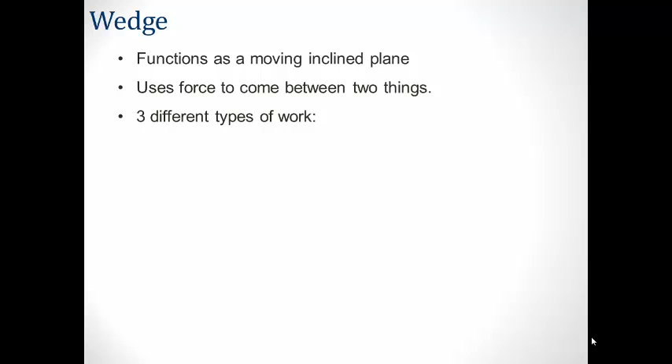This mini lesson is going to focus on the simple machine known as the wedge. The wedge basically functions as a moving inclined plane, and it can actually be thought of as two inclined planes sandwiched or placed together. It uses force to come between two things, and it typically can do three different types of work. One would be to connect things.

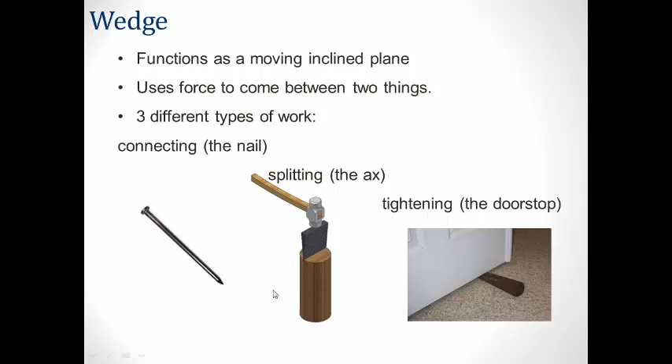An example would be the nail. It could be used for splitting things. A very common example would be the axe. Or it can also be used for tightening, and a good example of that would be the doorstop. Each of these represents the use of a wedge.

As with every single simple machine, there is a force-distance trade-off. The wedge is going to work just like a ramp. The narrower the wedge or the sharper the point, the easier it is going to be to drive it in and push things apart. The trade-off, though, is in order to get something to split apart really wide, you have to push the wedge a long distance.

So if you look at the picture, the amount of the wedge that I've got in there so far, the actual load is not pushed apart very far. To get that load to be pushed apart, that wedge needs to drive down deeper so that we can actually get that separation distance defined by the base of that wedge. The longer and thinner a wedge is, the less effort force is needed to overcome the resistance force.

Think about a simple kitchen knife. If you have a dull kitchen knife, that's because that wedge basically has been ground down. The sharper the knife, the easier it is to cut through food because you got a long, skinnier wedge once that is sharp. Another example, imagine you're trying to put a nail into a piece of wood.

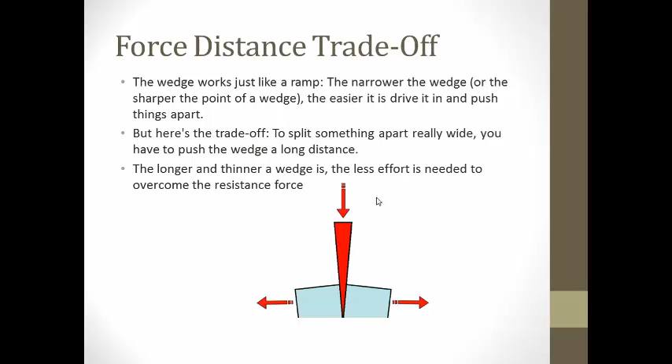What's easier, a long, skinny nail or a fatter nail? Hopefully you know from experience that the skinnier the nail, the easier it is going to be to drive in because it's got that, again, force-distance trade-off. The skinnier the wedge, the less effort force is going to be needed.

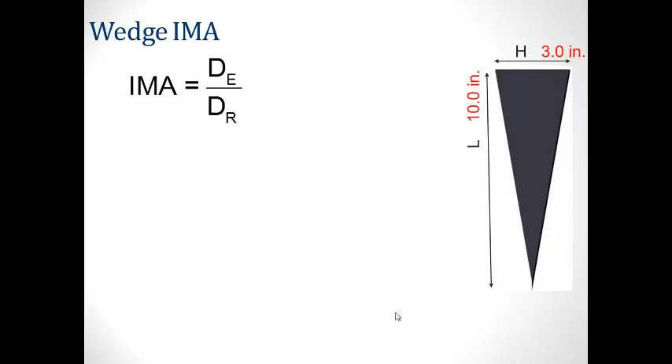So let's take a look at how to calculate the ideal mechanical advantage of a wedge. Just like every single simple machine, the ideal mechanical advantage is found by taking the distance of the effort divided by the distance of the load. What's different is where we take these measurements. The distance of the effort is going to correspond to the length of the wedge.

So as you are swinging your axe, you would have to go down this far to actually split your load or your wood apart. The distance of your load is the distance traveled by the resistance. That's going to correspond to the width of the wedge, in this case shown by the letter H. How far apart you're able to move your load is what we define as the distance of the resistance.

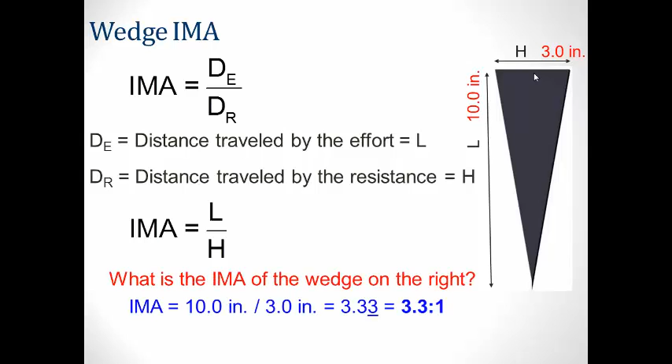Using the symbols in the picture, then, we're going to take the length of the wedge divided by the height or the base of that wedge to find our ideal mechanical advantage. In this particular picture, we're going to take 10 divided by 3, and we would get a mechanical advantage of 3.3.

Now there is some debate about whether the length is perpendicular to the height or the length represents the sloped surface. Using trigonometry, you could figure out how long the wedge is based on the height and that perpendicular length. Both methods are actually used, and there's very little difference in the calculation of the IMA with either measurement that you choose to take.

So for example, if I use my length to be the length of the slope, I would get an ideal mechanical advantage of 3.46. Notice it's only a little bit over 1/10 of a difference between the two measurements. So the moral of the story is it really doesn't matter which length you use. The mechanical advantage is going to be close enough when you calculate it.

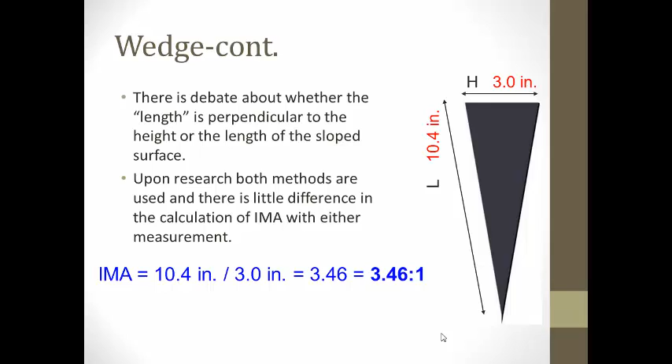The actual mechanical advantage is still going to be found by taking the force of the load divided by the force of the effort. Using this same wedge picture on the right, the force of my load is given as 700 pounds. It took 250 pounds of effort in order to move them apart that 3 inches. 700 divided by 250 gives us an actual mechanical advantage of 2.8.

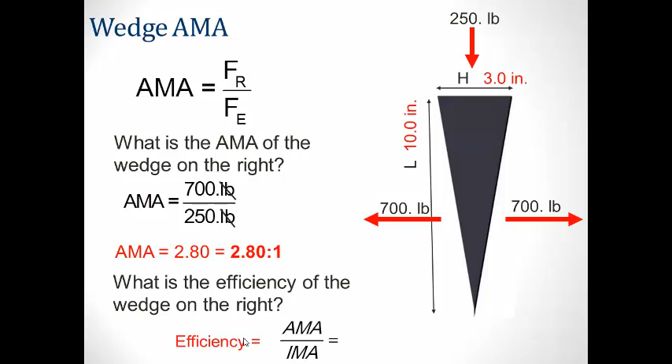The efficiency of the wedge, then, is your actual mechanical advantage divided by your ideal mechanical advantage. And in this particular scenario, it would be an 84% efficiency rating. Not too bad.